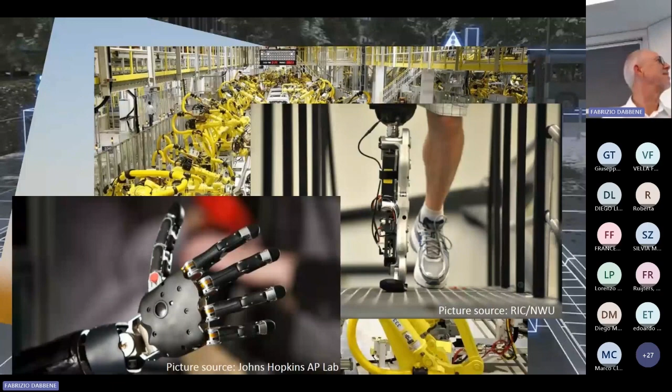In health. So there are very complicated processes that we have to deal with, and all our methods, if they are to be used in practice, should be able to deal with such systems. So we have tremendous complexity, much more than we usually have. We have this autonomy, we have networked systems, distributed systems, intelligent parts, some learning inside, and all our methods have to be able to deal with this kind of environment.

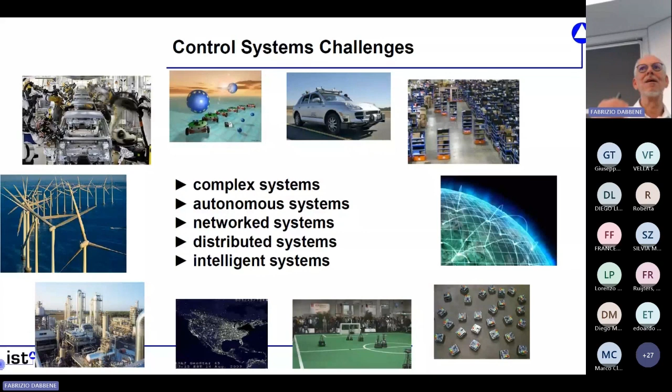Therefore, we have for control really a wish list. So if we want to judge a method, then this method should be able to deal with complex systems, nonlinear systems, highly dynamic systems, systems that we partly don't know, partly know, but maybe some things we cannot really model, where we have measurements that are potentially very bad, and we want to achieve a lot.

So in the end, I want to come back to that slide here, and we will go through that, and then we decide jointly whether the method I'm going to show you addresses all those problems. And I believe it does, because it's a combination of data, models, and prediction in the system, and having still control theoretic guarantees. And the method I'm going to talk about is model predictive control. Not really a surprise if you see me.

And just to start out, I know there are even experts in the field, people who are in the field much longer than I am, Ricardo, for example. So no need to explain MPC to most of you, but maybe there are some people who do not know it yet, and therefore I will briefly give an introduction.

So what does MPC do? MPC solves an optimal control problem. Nothing else than that. It's optimal control 100%. So given any method to predict the future of the system, normally we say given a model of our system, I'm generalizing it here because we want to use data, we want to find a stabilizing strategy that minimizes an objective function over an infinite horizon. That's the thing we are interested in. And we have some constraints that we want to satisfy.

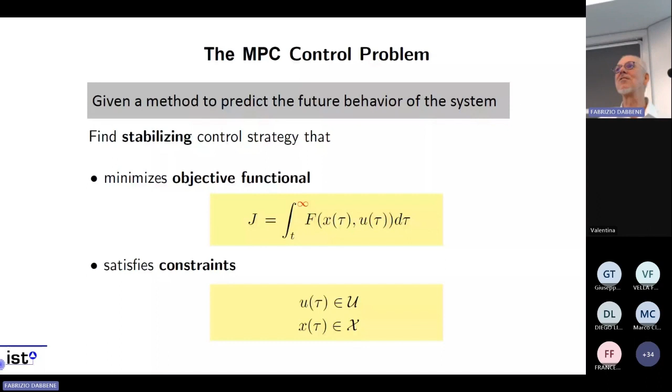So how can you solve that problem? There are various ways to solve such an optimal control problem. One is optimal control theory, 70 plus years old, lots of beautiful results. So characterizing what properties a feedback has to satisfy in order for the closed loop to have optimal behavior is known. Hamilton, Jacobi, Bellman, Pontryagin, all the names that we have in that field and that wonderful theory.

So we get very nice results there, but they all have a drawback, namely you cannot compute the controller. Except for toy problems, it's not possible to compute it. So wonderful theory, but not really very useful.

Now, what's the alternative? The alternative is that we think more locally, that we are not trying to find a feedback, a u as a function of x, but assuming we know where we are, assuming we have our x, let's try to find a function of time, an open loop control, a u of t into the future, that solves our problem. So that's a different sort of problem. And this has the advantage that it can be done. You can solve that in a good way, but you do not have a feedback.

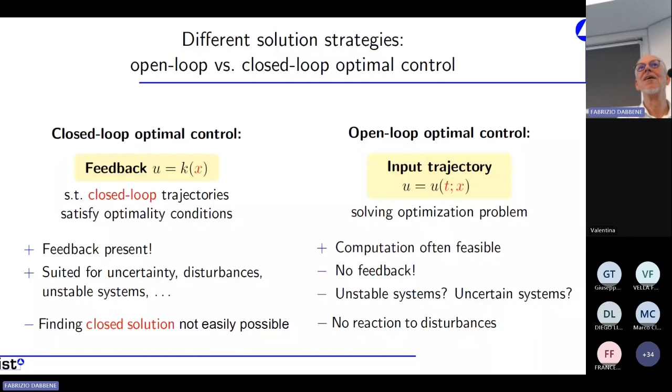Now, what is MPC? MPC is really trying to bring those two things together. Use the computational complexity on the right-hand side and implement it in such a way that you get a feedback solution. So you're not solving the problem only once, but repeatedly, all the time. You find a trajectory, a u of t, over the infinite horizon that minimizes your objective functional, satisfies your constraints, and so on. And then you discard everything of that solution trajectory except for the very first step.

So why do we have to compute the whole thing? Bellman's principle of optimality: only end pieces of optimal trajectories are optimal. We have to compute the whole thing in order to be able to apply the first step. And then we are doing that over and over again.

And of course, going over the infinite horizon is not really something we can do. Computing the trajectory over an infinite horizon is not possible. Therefore, we go to a finite horizon. So the finite horizon is not a feature, the finite horizon is the problem. We would love to go over an infinite horizon, and actually all the control theoretic problems would go away if we could do that, but we cannot.

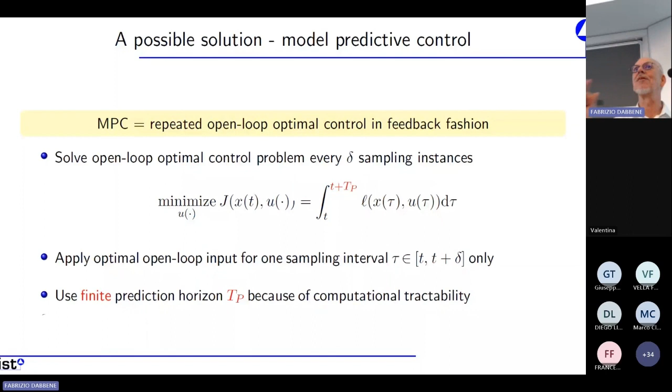We can only go over a finite horizon for practical reasons. So here, the cartoon that you all know. We are currently here in time. This is the time axis. This is the predicted future. This is the actual past that happened. We know where we are.

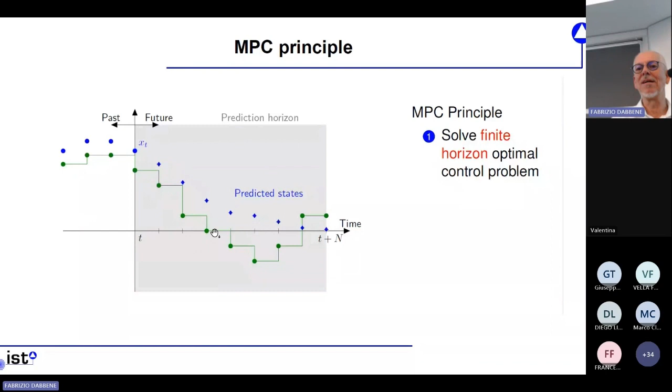And then over a horizon that I call n here, we try to find an optimal input trajectory that minimizes our cost function. And then we are only implementing the very first piece, throwing everything else away, and make the next step. And then we are solving the problem again. And the problem will be different because our horizon shifts. So we are looking further in the future. So it's not the same problem, but there is a very close connection to it.

So like in chess, where you plan ahead into the future, 100 steps or whatever you do in your mind, to think what you do in the future, and then you apply your first step, and then your opponent, we would call it a disturbance, makes the move, and then you are reconsidering. Maybe I'm going with the same approach, but maybe you're playing against a stupid person like me, and then you change your strategy and you think again over 100 steps and make a different strategy. So it's exactly the same what MPC does.

So what we have to do is solving online an open loop optimal control problem. So the same that we had before, minimizing an objective functional, now over a finite time. And we want to find a U trajectory over our finite horizon. And we want to do that based on our future that we compute with a model, on constraints on the states and on the inputs. And this is the problem we solve.

Now in MPC, the big problem in MPC theory is that this does not lead to a stabilizing solution. So it may go unstable, and in fact, it's very easy to construct examples where it really goes unstable. So you have to do something, and one of the approaches is you add those blue terms, a terminal weight or terminal penalty term and a terminal constraint to your system. And MPC theory, classically, the last 25 years, is how to compute this VF and this XF down here, such that the closed loop has nice properties. So this is MPC.

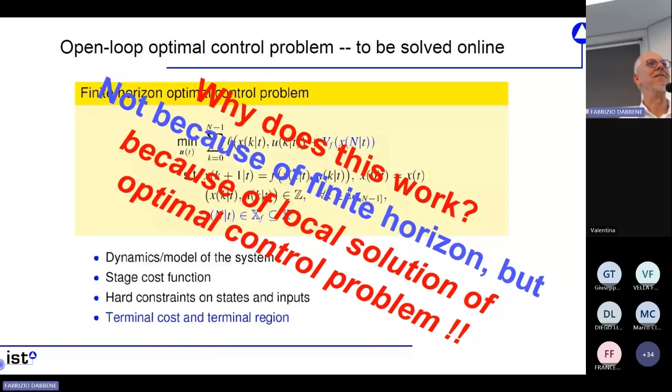The good thing there is we can deal with control theory. We know how to formulate the problem. We know how to compute the solution. Everything is very well understood. But there is a but. We need a model. And if you don't have a model, then you have a problem. And usually if you have a control application, then getting the model is the most difficult, the most time-consuming thing.

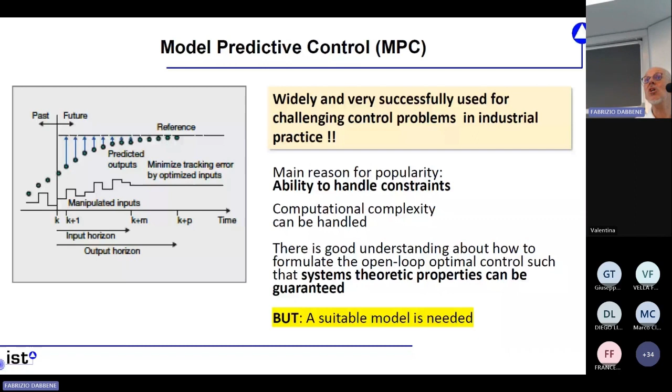So of course, the obvious reflex that you have: everybody is doing machine learning, artificial intelligence. Let's just learn our stuff. We don't have a model. Let's just learn the model and apply something. There are tons of things that are being done. Most of them, in my opinion, stupid. Some things really good. And everything that people in the audience are doing is, of course, on the perfect side. So please don't feel insulted.

So you can learn, of course, the control law. Reinforcement learning is essentially solving that problem with different means. You can also learn the cost function, the model. You can learn the constraints. There are tons of things. I was writing down here hundreds of articles. It's not true. It's hundreds of articles per day, I have the feeling, that are published in that field. You use your learning method with MPC, you combine it, you have a small example and you publish that. So this is not what I am going to talk about.

No learning in a direct sense in my talk at all, but using data, because I think the data is really the new thing that we have plentiful and that we can deal with. So no learning here, or only in the very end I make a comment why this method can be considered as learning. What we want to do is use data in a different way, and the basis is Willems' fundamental lemma, which probably everybody in the audience knows, but nevertheless I'm going to repeat it. Then I will go through that chain of parts: first model predictive control using this data for linear systems, then adding noise, robustifying things, and then going to the nonlinear world.

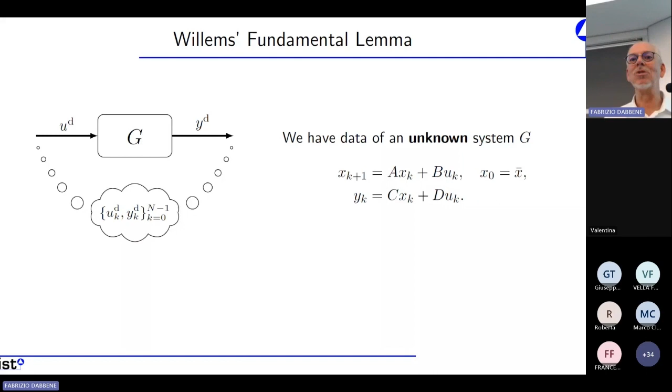So what is Willems' fundamental lemma? It is actually an approach that Willems and co-workers looked at in the context of identification. You have a linear system that you excite with some input trajectory, you get one output trajectory, and you assume you have an unknown linear system. Now, is that a good experiment? Do we get enough information out of that experiment, u_d, y_d? If you just insert 0 into a linear system, you get 0 out, you have no information about the system at all. Also, if you use constants, no information.

So what are good inputs? What are persistently exciting inputs? That was the question they answered in their paper. And the answer is surprisingly simple, essentially a consequence of the superposition principle for linear systems. We have an input trajectory over a certain horizon N, and we use the first elements of that input trajectory up to the capital L element.

This L will later be in quotes. I'm not going into details here, and it's not absolutely correct, but it's related to the dimension of the system that we want to find out. So this L is essentially which order we think the system has. If it is hundredth order, we need more data. If it is only second order, we need less data.

We have a longer trajectory than this L, and then we shift our trajectory by 1. So not u0, u1, u2, but u1, u2, u3, then u2, u3, u4, and so on. You shift until you run out of data, and you put that into a big matrix. This matrix has a Hankel structure, so the cross diagonals are the same.

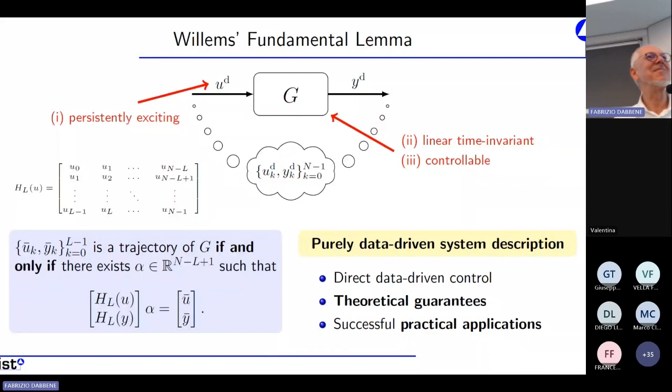The proof in one direction is one line. The proof in the other direction is much more involved. And there are still papers coming up trying to simplify the proof in the other direction, giving more insight. But nevertheless, it's understood. It's the superposition principle. Actually, in some of the talks I gave in the past, people afterwards were saying, hey, this is a trivial result. Willems would be insulted to have it called after his name. I wouldn't if I were Willems, but indeed, it's the superposition principle that we are using.

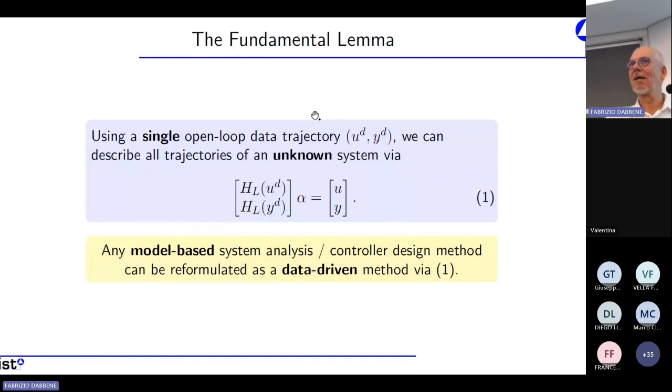So we have a way to characterize the dynamics of our system. It's a model, in quotes, of our system, but it's a data-based model because you just plug in the data of one trajectory, one single trajectory that you take offline, for which you check whether it's persistently exciting. So just a rank condition that you have to satisfy. And then you have a constant matrix here, and this gives you a way to characterize any dynamics of the system.

So, of course, once that was realized, which took more than 10 years after Willems' paper, that people realized that you can use that as a model, you can analyze the systems. You can analyze any property, or almost any property, of a linear system this way, just using that description. Here are a number of papers, heavily citing myself, but there are many, many more people doing that.

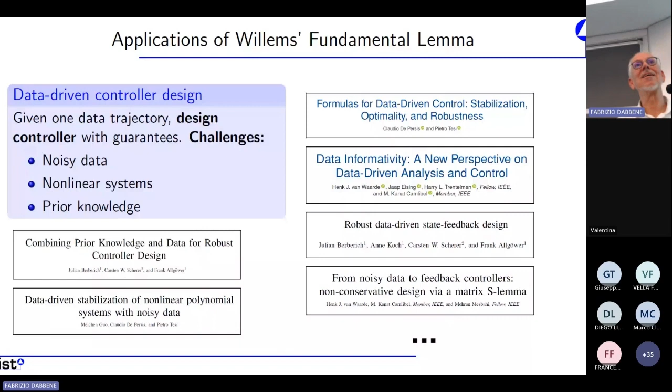But you can also do controller designs. Sure, you have a characterization of how U and Y relate to each other over this simple alpha. So just formulate it. You can do LQR, you can do LQG, you can do H infinity; really everything that you can do with the model, you can also formulate here. And now the idea that we are talking about here is to use that for MPC.

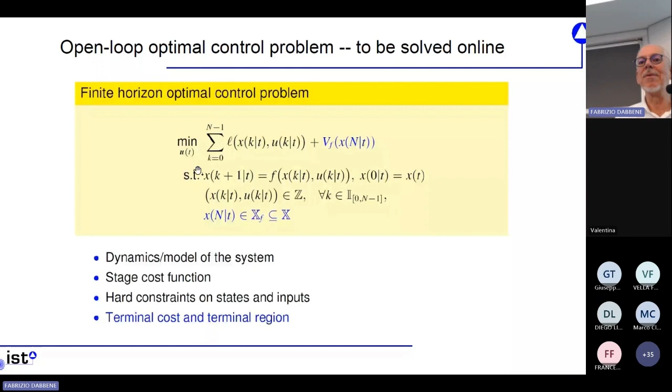So that's a very simple control problem. And this is really the good news for everybody, and there are quite a few people in the audience who are MPC experts, and I'm sure they agree. The output feedback MPC problem is not a simple one, but here we have an output feedback formulation. So it is by itself an output feedback MPC problem. So if we can prove something, it will always be for the output feedback problem.

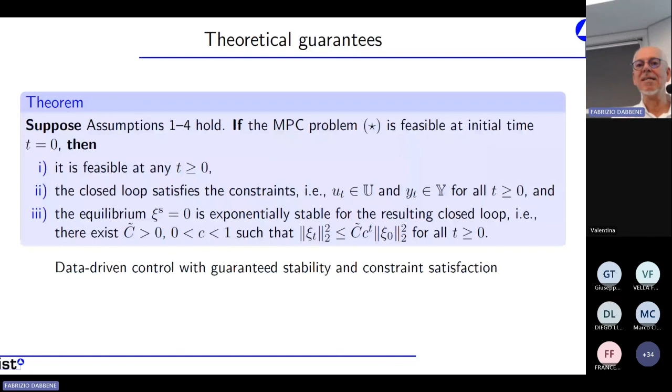So if we add that simple term, that red term, we have all the nice properties for an MPC. The proof is slightly different from before, but it's of course not a good solution, because if you force solution trajectories to be at the steady state after as many steps as you have prediction horizon, you're limiting yourself. So you have to do something else, and you can do exactly the same as in the model-based case, quasi-infinite horizon MPC ideas, so that you have a terminal penalty term, a terminal constraint.

And the interesting thing that I'm not going to talk about here is that you can compute those based on data. So you don't need a model to compute those, you use data, but not Willems fundamental lemma, a different approach. But it's possible to compute those. It's possible to extend it to economic MPC, but let me talk about something that's more important.

Namely, at the moment we were assuming we can measure our output precisely, and that is not the case, of course. What we always have is measurement errors. And those measurement errors usually kill this description that we have so far. And we have even two sets of errors, right? We have this one trajectory pair with which we fill our Willems fundamental lemma Hankel matrices, and of course the output there is disturbed. So it has a measurement term that I call epsilon here. And also in our online data that we are measuring, we have a noise term. So two times you have noise entering your system.

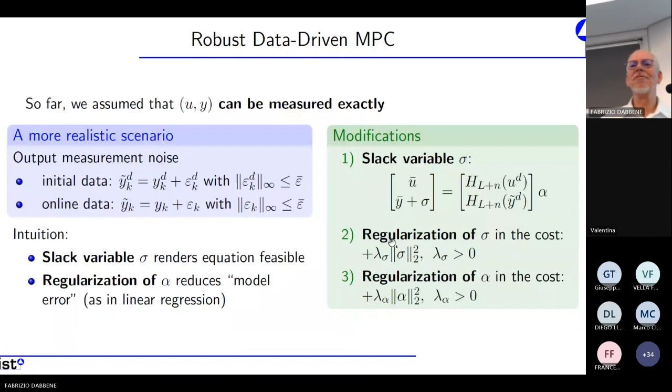So we are just adding a regularization term to our objective functional, demanding that the sigma does not get too large. And for numerical reasons, you are also regularizing with the alpha. If you are interested in that, I can talk about that more. So in the noisy case, which is really the robust case, we add two terms here to our objective functional.

Here we have noise, there we have noise, we have the sigma here, and we let the optimizer pick the sigma. That's the nice thing about MPC. Anything that you don't know, the optimizer should pick it. Of course, you have to prove later on that this leads to something meaningful, but this is how it works. So now we have a more realistic thing. And in fact, the sigma is like an output disturbance that we are having here, right?

So what we are doing here is really robustifying the method. And for that method, you can prove again that things hold. Again, under standard assumptions, we can prove that we have recursive feasibility, that we have constraint satisfaction, and that we have some sort of stability. But now the stability will not be exponential anymore because we have the noise. You can only go to a neighborhood of our steady state. So we have a practical exponential stability.

That's a pretty strong result, isn't it? So we don't know our system. We have no assumption on the model. We have constraints. We want to solve an optimization problem. And still, we can prove that these things are true. So actually, I would say it's even a little bit surprising that you can do that. You can extend that to output constraints. You have to do a proper constraint tightening, lots of things.

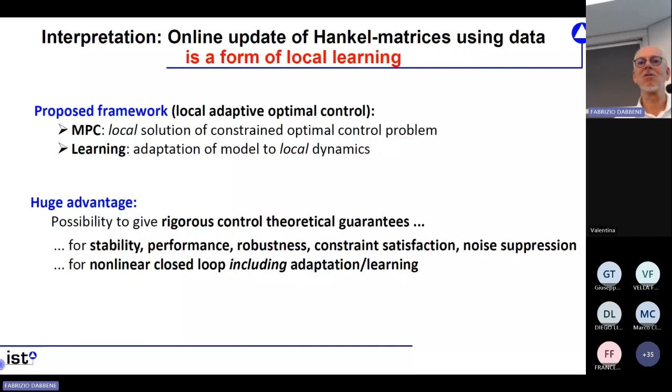So what do we have? Our framework is a locally adapting optimal control where our MPC and the learning are both done locally. And what we have is computational tractability. We only have to solve a QP, and we have guarantees. At least we can check things, right? So you have to check a number of things which you have to do online, but you can check them, and if they are satisfied, you know that in closed loop everything works. And now this also works in practice.

Is it now 45 minutes? It's okay, yeah.

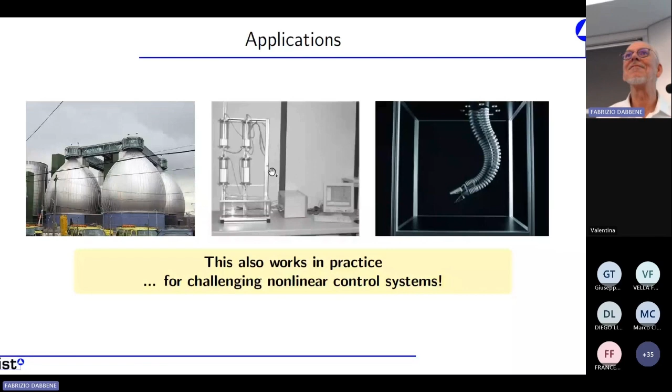So I very briefly go over some applications. The applications are a chemical plant, our 4-tank system that went unstable, and I want to show you with the same horizon that it goes unstable, that it's stabilizing, and a more realistic example in the end. And I go through that very quickly. So this is only a simulation of a classical continuous stirred tank reactor. And I just want to show you one thing.

Namely, here are, for one initial condition where you have a set point up here, 3 closed-loop trajectories. The red one here is if you assume you have the nonlinear model of your system, and you do a model-based MPC controller with a stabilization term. Then you get the red curve. The blue one here is our data-based MPC controller. The black one, disregard, that is not really interesting here.

And what I want to point out is, of course, the data-based MPC is worse. If you don't know anything about your system, how can you possibly expect that you get a thrilling performance of your closed loop? It's not a theorem; you can be lucky, and it's better. Normally you get a worse behavior than from the model-based case. And that's to be expected.

And that also means, if you know something, model it. And then only those terms that you cannot model, you take data-based on top of that. And that's possible. You can use that methodology in a hybrid way. So don't expect anything fancy from that.

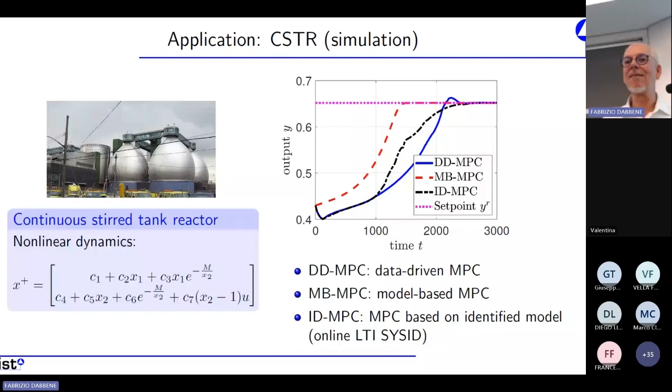But if you are updating your trajectory and you're going to your set point, then what happens? Our Hankel matrices are filled, if the set point would be 0, with zeros. We have 0 in, 0 out. We agreed before that's not a good thing. So this methodology gives you a problem the moment you reach your goal. So you have to do something. And of course, there are many ways what you can do.

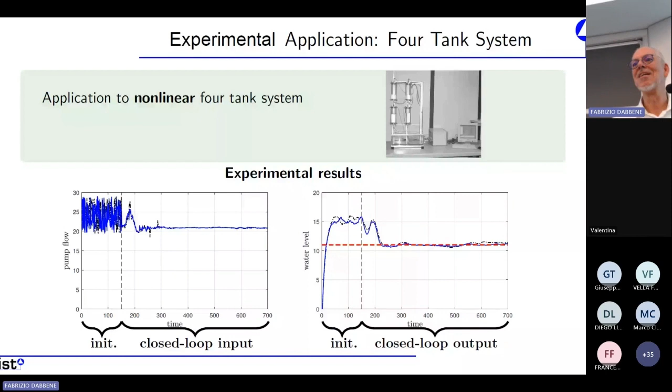We want a fluctuation. So always give us a delta U no matter what. And then this is the outcome, which I think is pretty good. And this way you can achieve that for the whole time you satisfy your conditions, namely this persistency of excitation. Many things that you can do there. All of them are practical problems.

Now, this is a real application and a really interesting application. And now I'm really running late, so I'm coming to an end. So this is joint work with a colleague of mine, Oliver Sawodny, and they have from Festo a very nice robot. This is an elephant trunk-like robot. It's a pneumatic robot, so it has a lot of pneumatic actuators all over the place, and modeling that system is a nightmare. Or actually, Oliver says modeling that system is a very interesting research problem, and so he already had 2 PhD students working on the model for that.

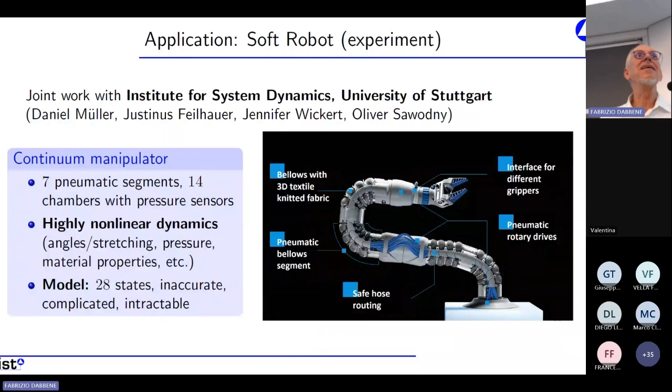It's damn complicated. You can get a PhD with that easily, but it's damn complicated to do a model. And then, of course, doing a model-based controller design. So our idea was, hey, in principle, we know how a robot arm works. So we have a standard model, but we don't know how the pneumatics work. Let's just, for the pneumatics, use our method. So for that part of the problem, we use data, online data as we get them, and see what happens.

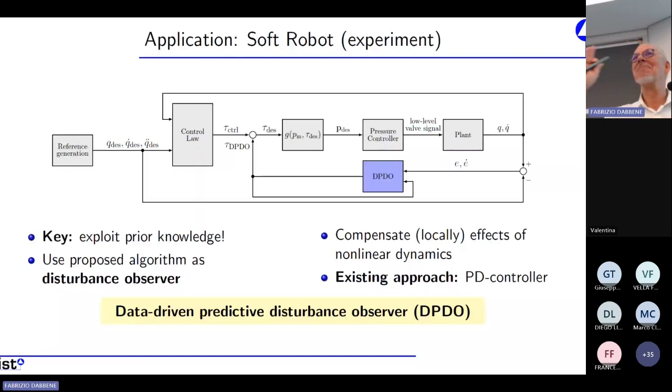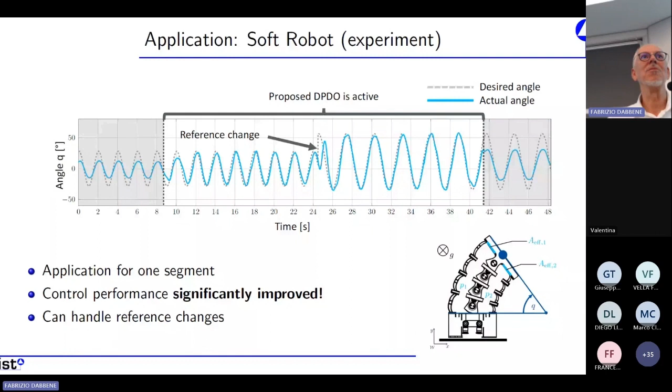So it works. And the price to pay, this is an afternoon from my perspective. From the implementation perspective, it was much more. But from the theory perspective, it's an afternoon, because you don't need anything, right? You just say, this is my optimization problem. These are the terms I want. Here are the data in my system. And it works. And it really works for many things.

So summarizing, what we have is an output feedback MPC scheme for unknown nonlinear systems that are disturbed by noise. So pretty big thing. And there are 2 elements to it. One is our different modeling, data-based modeling, and the second one is a simple local learning. And together we can give guarantees for that. Now, if we come back to that slide at the very beginning, what are the things we want to achieve for a good control method? Well, we have it, right?

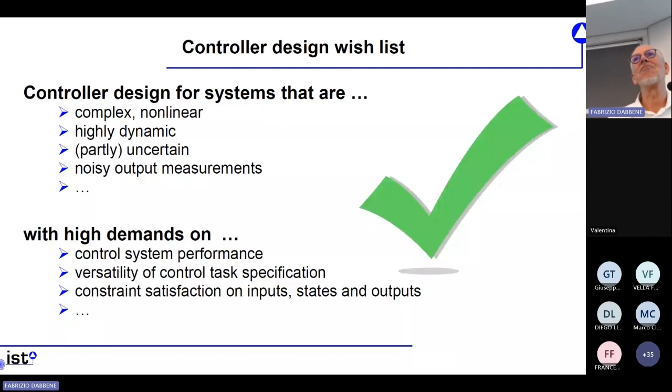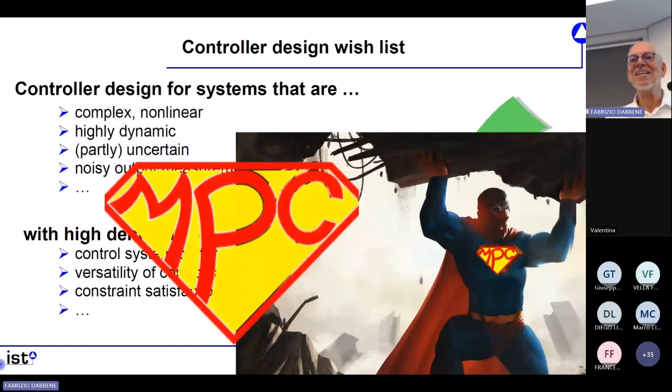Okay, limits still apply, but a quadratic program we can solve for high order. So we can really assume, hey, the order is 100 and it's no problem. We can assume the order is 1,000 and it's still computationally usually not a problem. And we have all those properties now, and we really satisfy all of them. So I couldn't resist doing that here. That's the MPC Superman, and really it solves the problem. But of course, there are many open problems still to be solved, and many real applications to be done. A couple of companies are even interested in that and are trying that out.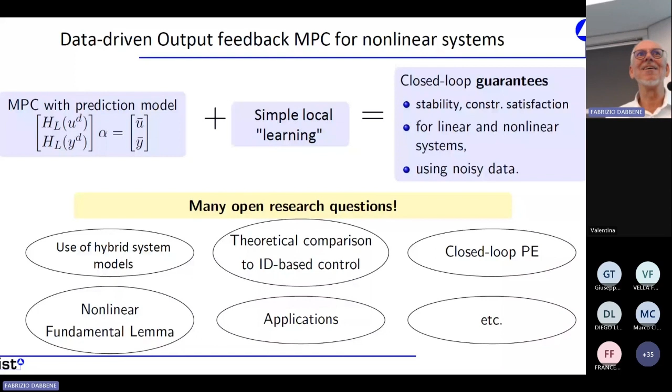The work has not been done by myself. I'm only a co-author on the papers. The main author is Julian Berberich. Most of that stuff is his PhD thesis. There are other people who contributed significantly.